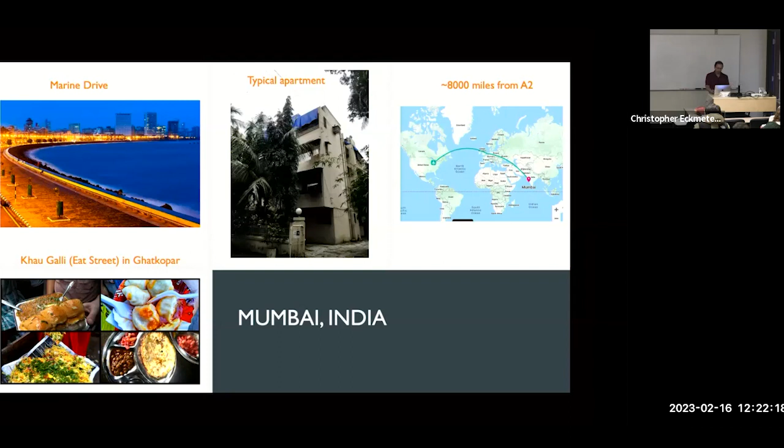And thanks to things like Facebook and WhatsApp, we still know what they're doing, people are still in contact. This was a really nice period in that we grew up with friends from kindergarten through high school, a lot of whom are still in contact with what each other is doing.

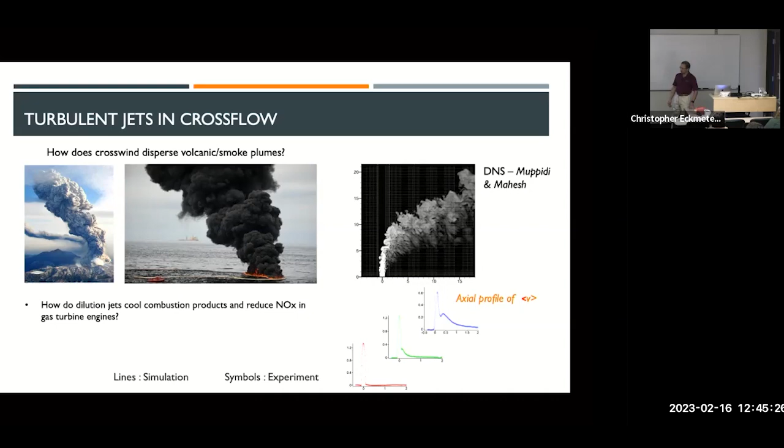So this is an example of one problem that we worked on there. Another one that Mike Mattson worked on for his PhD was: can bubbles over ship hulls reduce drag? This was something experimentally looked at in Professor Ceccio's group, and we developed a simulation capability for this.

The upshot of it is the simulations, as well as the experiments, showed that yes, bubbles can reduce drag, but not over long distances, because the turbulence wants to migrate the bubbles away from the wall. That's called turbophoresis. So this is an example of another problem in another flow regime that we worked on.

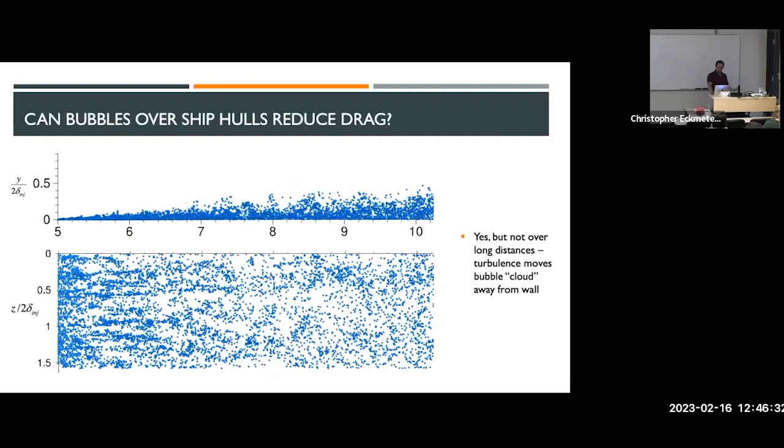Now, if you just took a tree or a smooth cylinder and stuck it in winds of that strength, it shouldn't be able to last, right? You wouldn't build something 50 feet tall and put it a foot under the ground. But these do, how?

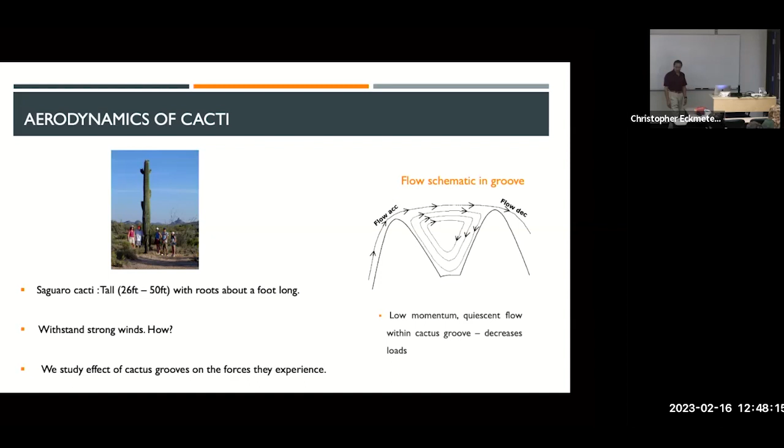That's transition. Now, when the flow goes turbulent, your heat transfer and drag go up. Heat transfer is what constrains the re-entry problem, because it's really hot, and if you break through the tile, you're burning - that's a failure. So the idea is to predict how things like that cause transition. The study was important because engineering models have difficulty predicting transition.

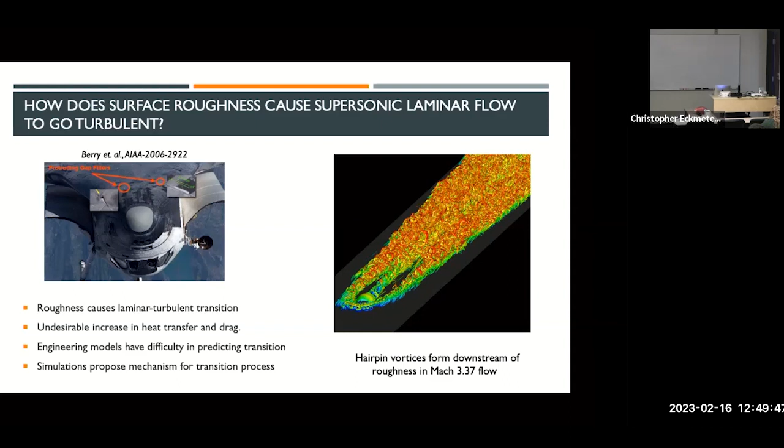So what we did was look at a representative problem like that - this is one of them, where you have a single protuberance in a supersonic flow. It's all laminar here, but downstream you see it's completely turbulent. The simulations were able to provide a mechanistic reason for why that happens, and why models might have difficulty predicting things like that.

The reason you care about a problem like this has to do with scramjet injectors and scramjet engines, where fuel is injected, mixes with free stream air, and that's how burning, combustion, occurs. Another application of these things is in thrust vectoring, where you send jets out from the side, and the resulting thrust allows you to roll and control attitude.

So those were some examples of things that students in our group worked on at Minnesota. In the remainder of this talk, I thought I'd speak to NAME research, whose overarching vision is as follows: when we think of naval or marine relevant flows, they're quite complex in terms of geometry, and complex in terms of the physics that they have. What we'd like to do is develop methods to predict those things reliably.

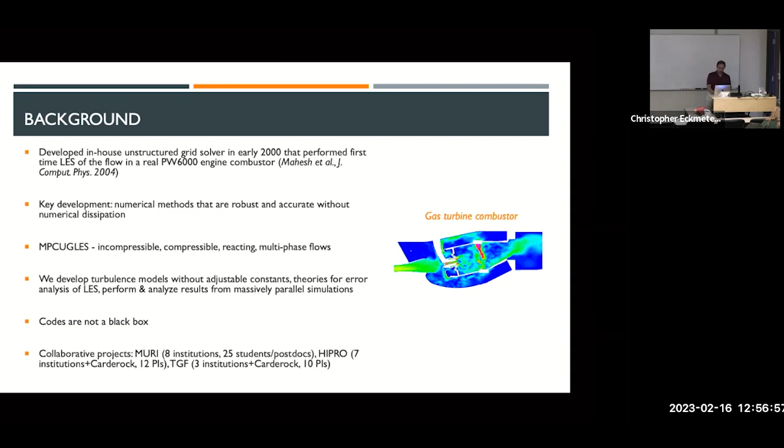We call our code MPCUGLES. It's entirely in-house, and these codes are not a black box. Students actually work with them, with source code. We're involved in a number of collaborative projects involving the Navy, as well as other universities around the country and abroad, and students interact with those groups.

Now here you're doing particles. To do this, there are two key challenges, numerics and parallel scaling, that we address. Here you're doing particles, but now what we want to do is take the same capability and apply it to a maneuvering body, all those problems I talked about earlier.

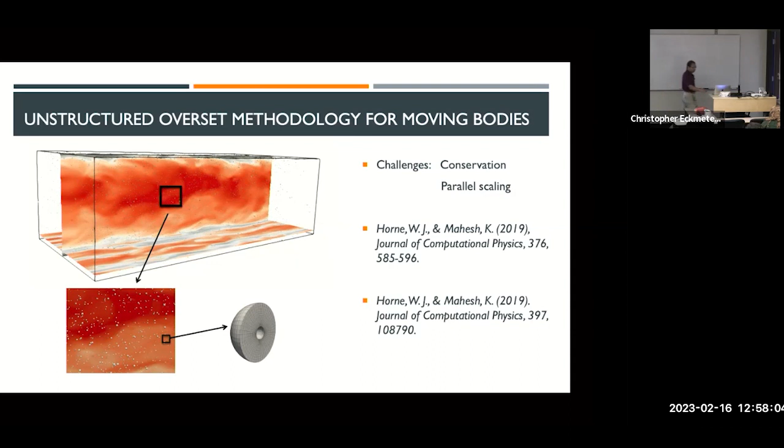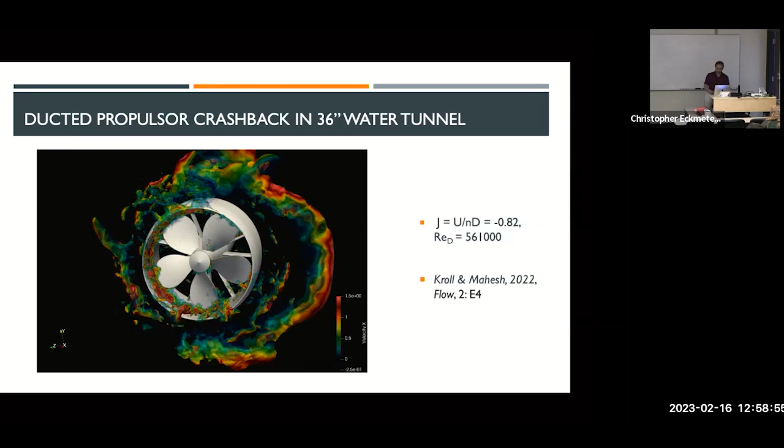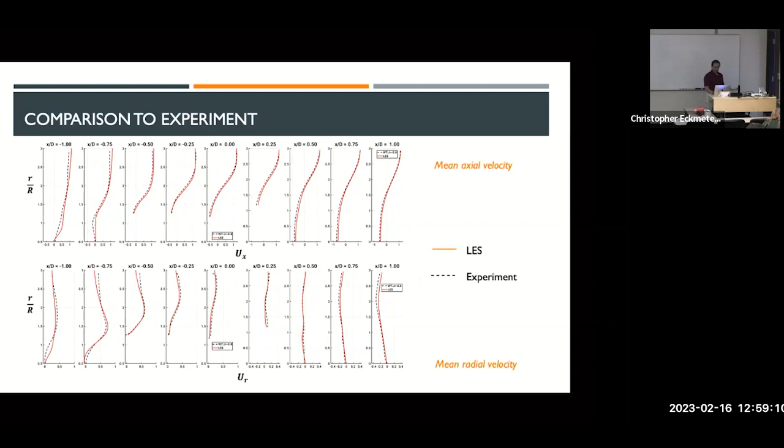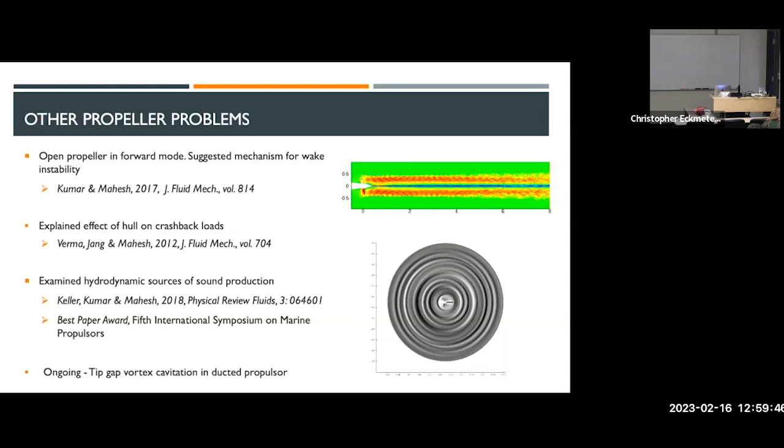Other propeller problems we've looked at - I'll summarize a couple. We've looked at flow through an open propeller where we were interested in the mechanism of wake instability. Again, the results agree with experiment, and because they agreed, we were able to use them to explain that. We've looked at the effect when you attach a propeller to a hull, to a stern - the proximity to the stern affects crashback loads. We've explained that, and we've used simulation results to predict sound that propellers radiate, which a paper by Jacob describes. Presently we have work going on cavitation and ducted propulsors, and tip vortex cavitation in ducted propulsors.

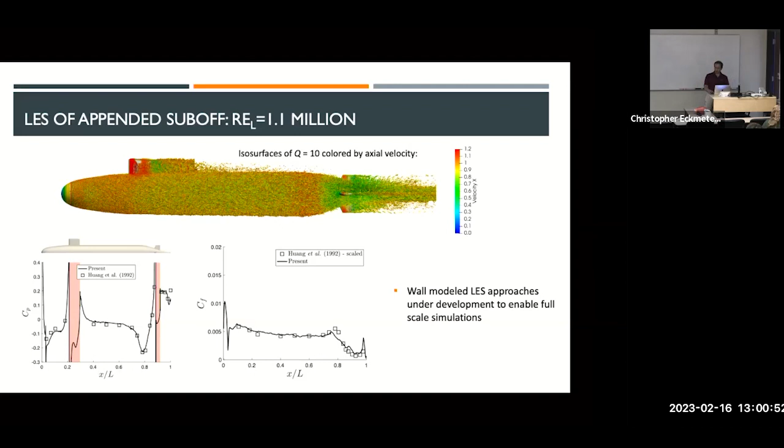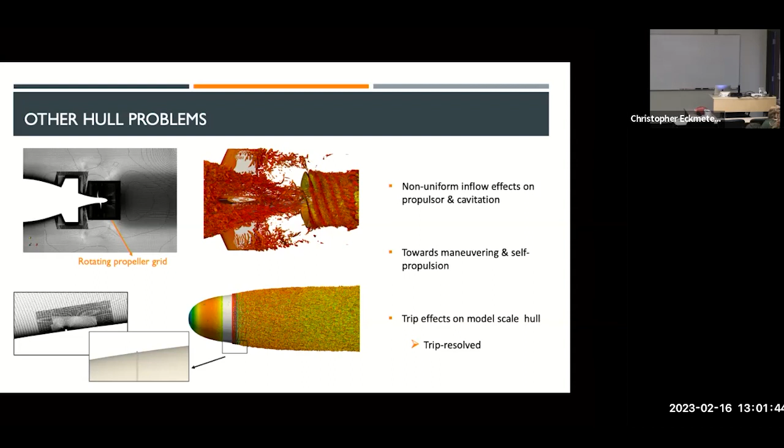Model scale experiments have to trip the flow to make it go turbulent, so it's more representative of what happens at high Reynolds numbers. Now, while people know that trips matter, how they affect the flow isn't quite clear. We are now at a point where we can actually resolve those little trips that the experiments use in our simulations. We've started to do that over the last 2-3 years, and this promises to be quite interesting in terms of establishing the connection from model and full scale.

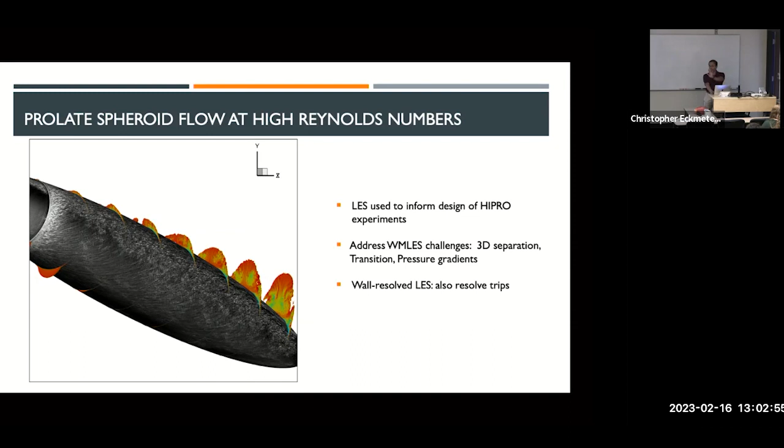What this shows you is how the flow turns. It's called cross flow, comes here to the leeward side, and then separates to make these big vortices. These big vortices are what cause big unsteady forces. So when something maneuvers, stuff like this is forming and affecting the loads. That's why you care about this. And we are not there yet — this is very much something that we are actively developing and hope to.

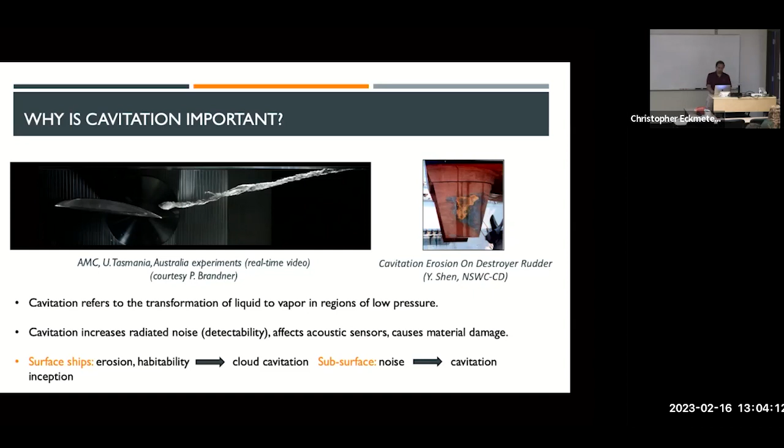So we would like to ask, can you simulate it? Can you predict it? Here is an example of where we are in this process. We first looked at cavitation in that erosion regime — you have a big cavity which forms and collapses. Can we compute it? Prior to this, people did not quantitatively predict cavitation.

But Steve Ceccio here at Michigan performed experiments, and Steve and Harish performed experiments on what's now called the Michigan wedge. So this is a wedge, flow goes from top to bottom, and the flow cavitates. This white thing is a simulation result — it's basically vapor forming on this wedge. It rolls up into this cloud. The cloud comes into high pressure and collapses, and you have strong pressure waves traveling up and down in this flow.

Now, when that happens, the experiments showed, and the simulations are able to reproduce it, that there is a big shock wave that travels at supersonic speeds. This is water, mind you — you don't get even compressible flow in water normally. Isn't density supposed to be constant? It is, until it cavitates. Now it's bubbly water, and so the sound speed is very low, so you have shock waves traveling at supersonic speeds. This is a quantitative comparison to the Michigan wedge experiments.

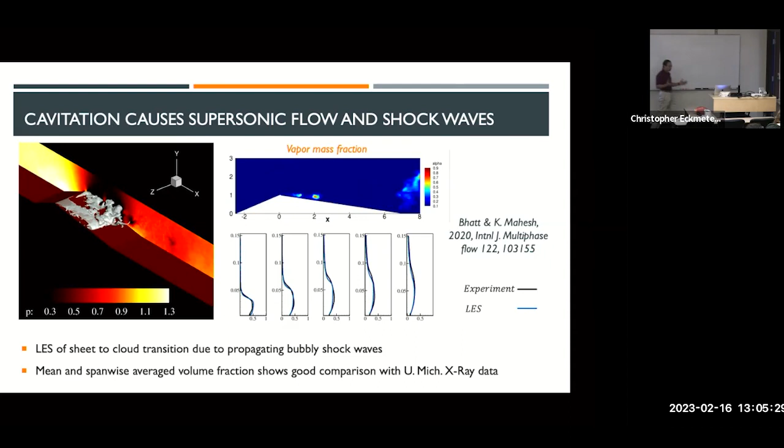The whole point here was developing this capability to where we could have some confidence in predicting these large cavitating flows. This work is going on in the direction of further improving the modeling as well as applying it to more complex configurations. For example, there is a difference between gas and vapor — water vapor is not the same as gas. Water vapor is related to liquid by thermodynamics; one converts to another. Gas is gas, it doesn't condense in water. So it matters whether you have gas bubbles or vapor bubbles.

How do you account for that? How do you predict cavitation inception? You saw that we can do a reasonable job on large cavitation. It just starts to form, and it's very noisy — how do you predict that? I won't get into the details, but we're starting to do that in the flow, where these blue regions are where cavitation incepts.

And we can show that it's little vortices that are stretched by the turbulence. And that's consistent with experiment.

Can we develop a multi-scale cavitation model? Schematically, if I have a large vapor cavity along with very small bubbles, I can't just put a mesh and resolve the small bubble and the large guy. You've got to model this while resolving that. How do you do that in a consistent way? The small can become large, large can become small.

There's work going on in there. Cavitation starts from small nuclei, very small nuclei in the ocean, water tunnels, and so on. Right now it's just an empirical thing—we just assume something. Can we predict it from first principles? So we've developed an approach, and are developing an approach, to do that.

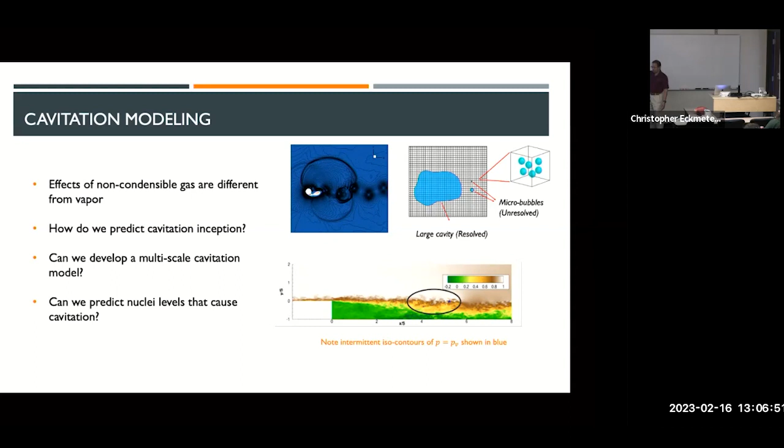So these are the sorts of things from a physics modeling perspective. We have work going on in fluid structure interaction and sound. The practical relevance here is that if you have that crashback problem, the transient loads are such that they can cause non-metallic composite blades to break. The strain rates can be very large. How do you predict it?

A normal propeller, or a surface of a hull where you have panels to absorb sound—those are compliant. And water is very dense. If you ever stuck your hand in the water off a boat, you know it. Water being this dense causes those panels to vibrate, and when that happens, the vibration contributes to noise. So can you account for that?

And so we're interested in cavitation erosion as another example of fluid structure interaction. This is one example of where we are in this process. And I just, in words, told you things that we care about going forward.

What you have is a turbulent flow that we computed using DNS. On the bottom, imagine a plate—this plate responds to the flow, and we calculate that using an in-house FEM capability we developed. We calculate the deflection, unsteady.

And when that happens, it radiates sound, and we can compute the far field sound using acoustic analogy. We want to use things like this to ask questions like: I care about something going on here, and I care about sound here—what part of the flow contributes to the sound here as a function of frequency? How do you answer that question with volumetric, full detailed data? We've developed methods like that in this paper.

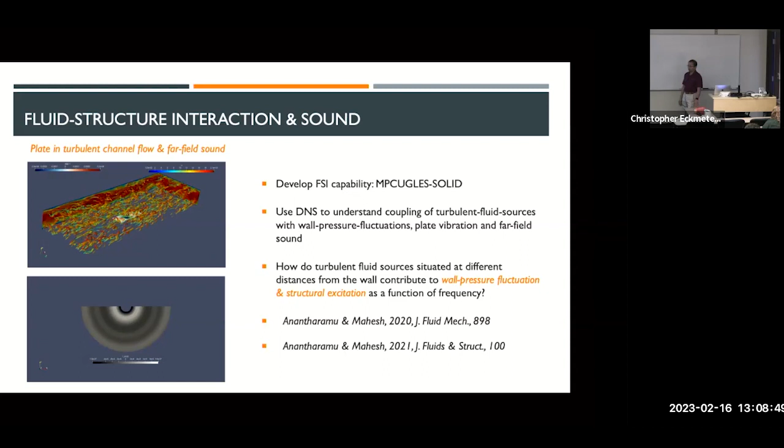The idea is to take this capability and now use it to look at things like: what if I had Kirigami surfaces? Can I use them for surfaces more complicated than just flat compliant surfaces? How do I do erosion, for example, and so on and so forth. These are all examples of things we care about going forward.

Biofouling is something we have an interest in. What biofouling is: you put something in the water for a while and it's covered with crud. So the real surface is no longer nice and smooth—there's stuff on it, and that affects the flow and the resistance. Can we understand and study that?

In this top panel, this is a tile given to us by experimentalists at the Naval Academy—they scanned it with line scans and gave it to us. We converted that into a geometry over which we computed the flow, and that's what's shown here. These little bump-like things are the asperities in that rough surface poking through the plane where we plotted data. So we're actually capturing flow within these cavities and things like that, and using it to say: this is why wall pressure fluctuations are higher, this is why resistance is higher, and so on. That's what that was good for.

In addition to simulations, we also do things like stability analyses. Computationally, you can't do them analytically for very complex geometries, to actually answer how these complex flows transition, how trips work, and so on and so forth.

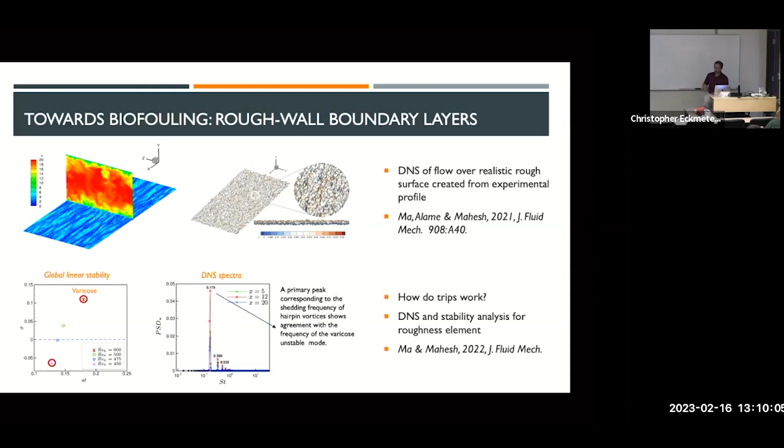And this is the future as I see it in terms of where we would go as a group, where the field would go forward. GPU-based acceleration methods can get an order of magnitude to 30 times speed up, and that will allow LES for certain problems, allow desktop LES, and get us closer to full-scale simulations of the biggest machines we have.

Multi-physics is part of it. Naval problems are extremely interesting and rich in terms of things to study: surface roughness, transition, fluid structure interaction, cavitation, hydroacoustics are things I touched upon. Maneuvering is something we're just starting to do with this kind of capability, and that's going to open up a whole new set of things. Then free surface problems. We've done that in the context of super hydrophobic surfaces, but imagine big things being close to the surface or piercing the surface. How do you deal with that at our level of simulation?

Numerics and turbulence model development will go on. Big data and model reduction - we are generating terabytes and terabytes of data. How do we make the most use of it? You can plot things like this, that's great, but can you also do more? Can you improve simpler models, and so on? This is of active interest right now. Data assimilation - you have an experiment going on and a simulation going on. Can they use each other's data? Yes, we have a project right now going on along those lines.